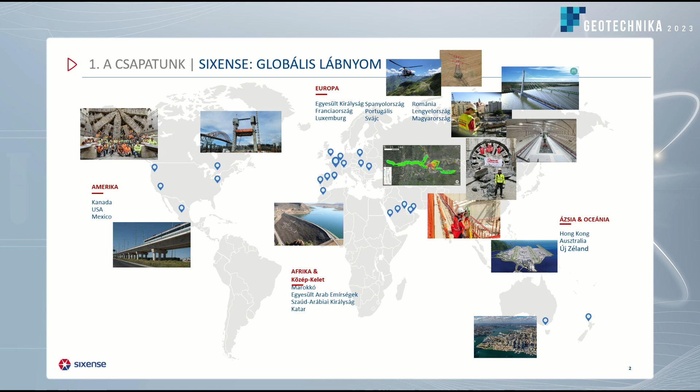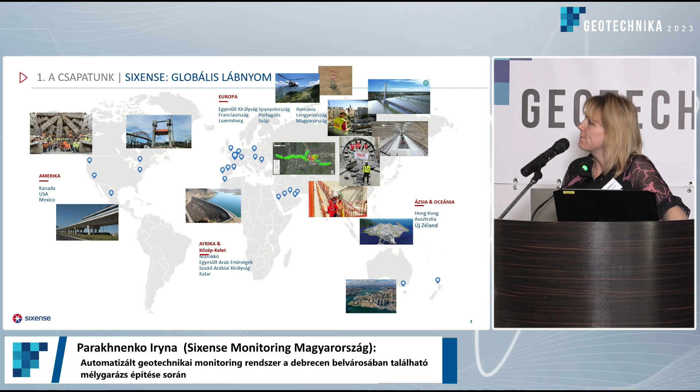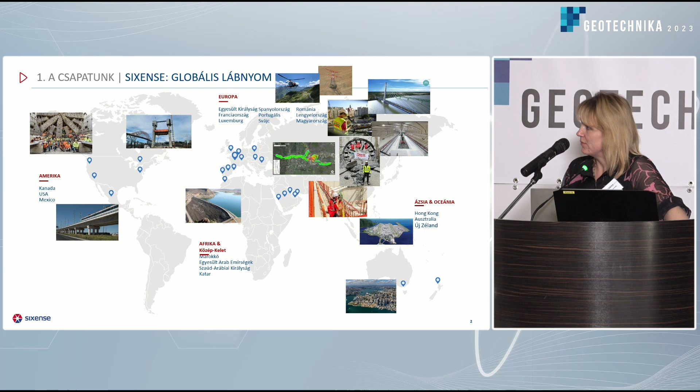Worldwide, the company has realized many complex projects in tunneling, hydropower, residential construction, power plants and other areas - dam construction, tunnel construction, bridge construction, wind power plants, nuclear energy, and more.

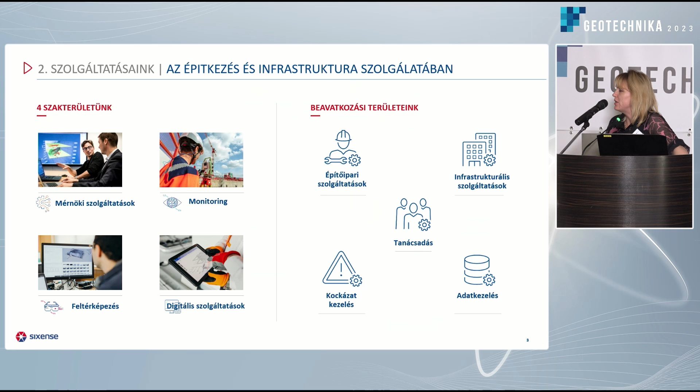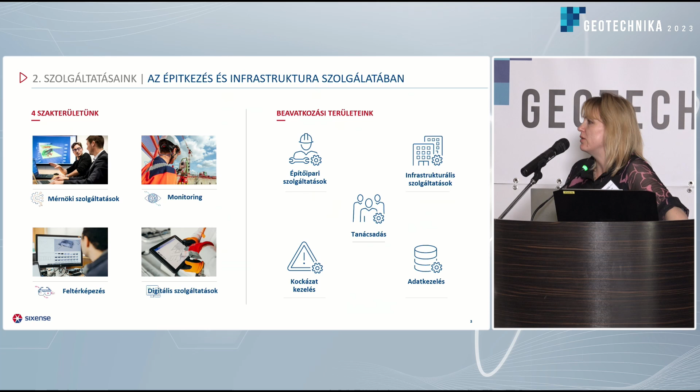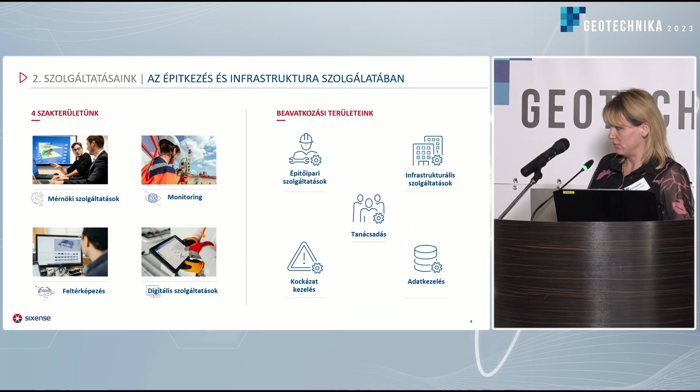And digital solutions, meaning several platforms to manage the construction process and monitoring data. It can be used in the industrial sector, infrastructure projects, and basically for existing sites and sites under construction.

It can be linked to urban construction, bridges, hydropower structures, industrial sites - buildings and functional facilities, transportation infrastructure, water infrastructure, energy, industry.

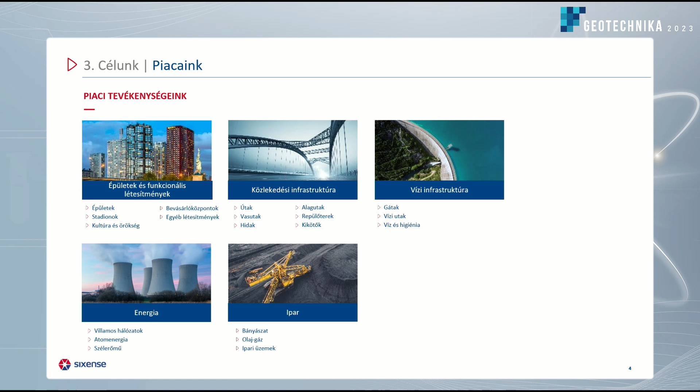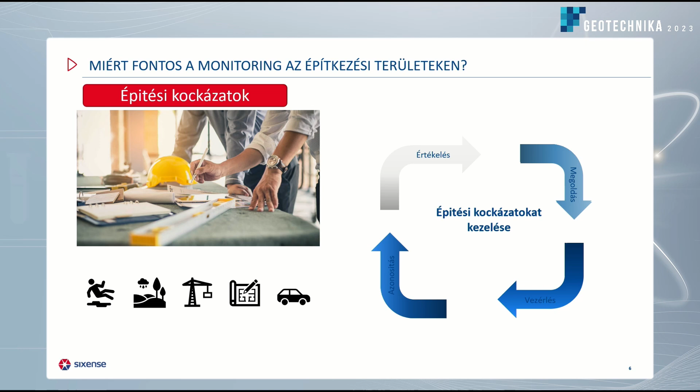Now I would like to come closer to the topic of our presentation and explain why automated monitoring is important during construction. First of all, because there are always risks related to construction.

Of course, not every situation requires automated monitoring - sometimes manual measurements are enough. Everything is assessed at the beginning, before construction work starts.

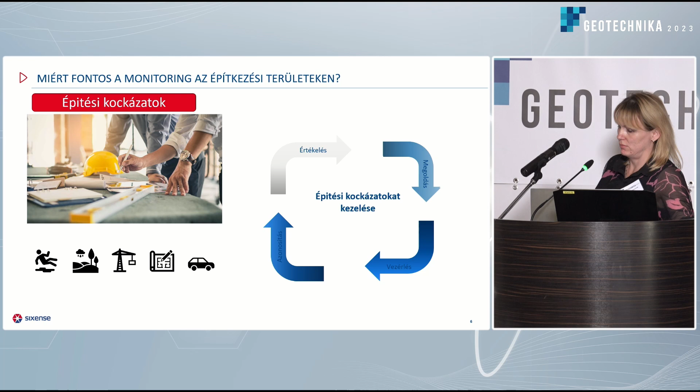But in cases involving underground structures, parkings, very narrow spaces - which are more and more common in cities where new buildings appear - in order to understand the impact of construction works on existing structures, monitoring needs to be more frequent and precise than manual methods, showing data in real time.

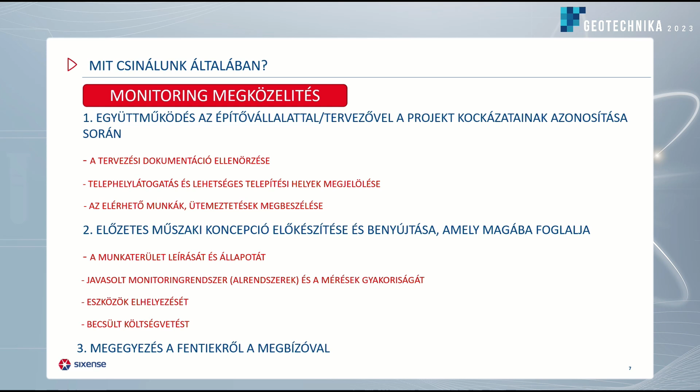Therefore, at the very beginning, we work with the construction company, the main contractor, or the designer to identify and understand the risks of the given project before starting work.

Then we prepare a preliminary technical concept of the system - design documentation, a monitoring plan - and this technical concept is agreed with the designer or main contractor.

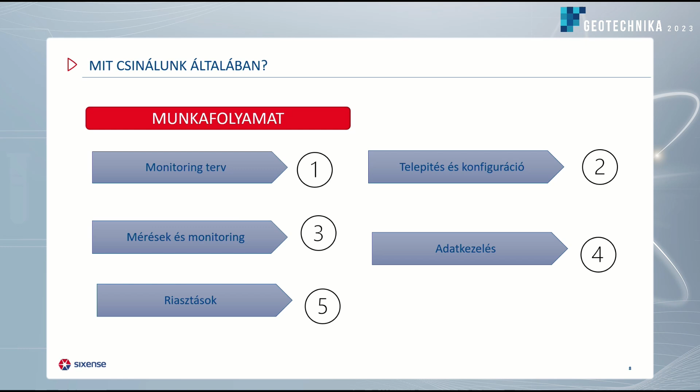And once it's agreed, we can develop a monitoring plan, install and configure the system, perform the monitoring, and provide data automatically with the requested frequency and an inbuilt alarm system.

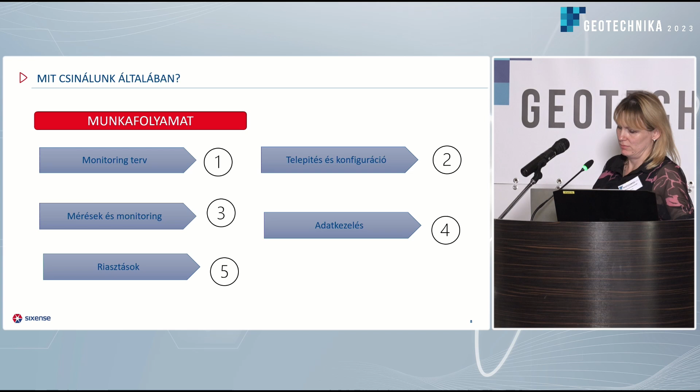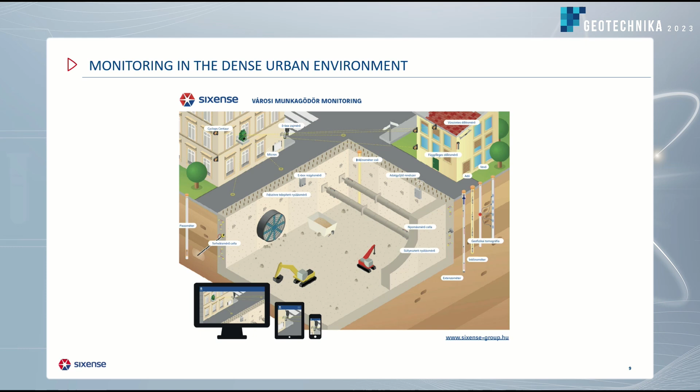On the example of this scheme, in the case of construction in the city, we can propose different systems that control settlements, movements, or deformations - as shown in this image of a densely built urban environment, with various solutions for problems like deformation, settlement, and ground movement.

Usually we do not manufacture any sensors ourselves, but we can integrate any type of sensor into our system. The heart of our system is our software, which can process and provide data for analysis to the relevant persons.

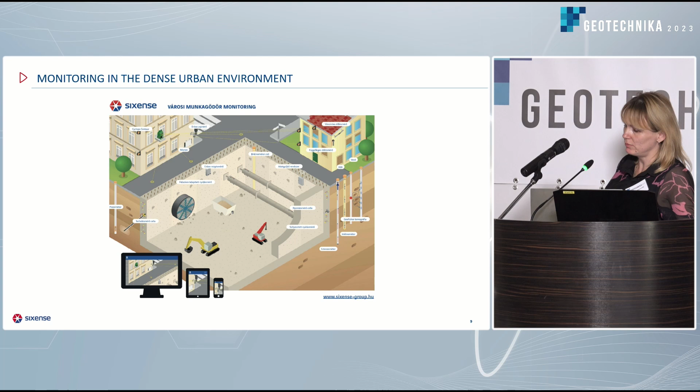This concept of an automated monitoring system can be used in different areas - as already said, in the city or for landslide areas. Depending on the technical situation, problem, or risk, we can propose the relevant instruments and provide the possibility to analyze data.

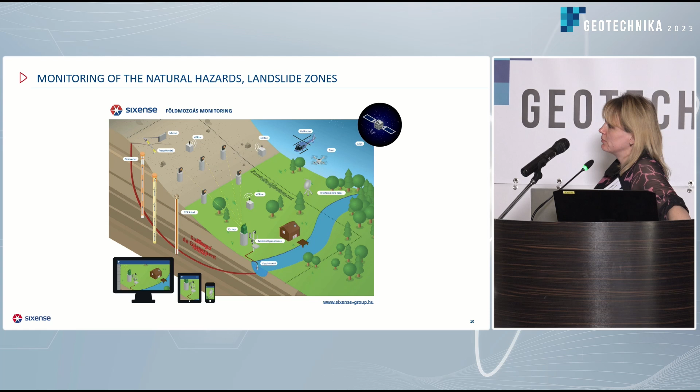This can include inclinometers, piezometers, surface movement sensors, or deep movement sensors.

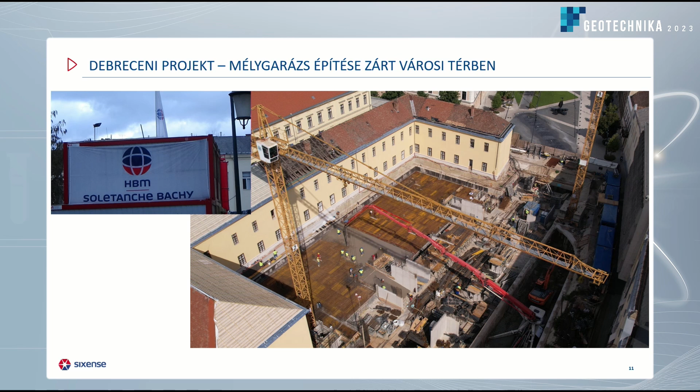And now we will go to a few slides about the project in Debrecen, which we did together with HBM. We were very happy to have this great experience.

This project was done during one year, I think, for the monitoring system.

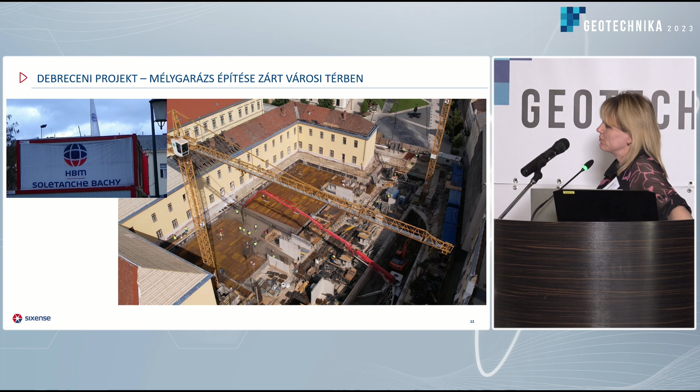Here I can see a few slides. It just shows the surrounding streets and buildings for the construction site.

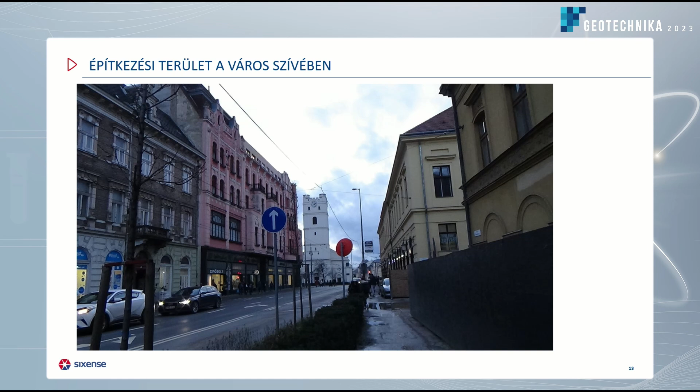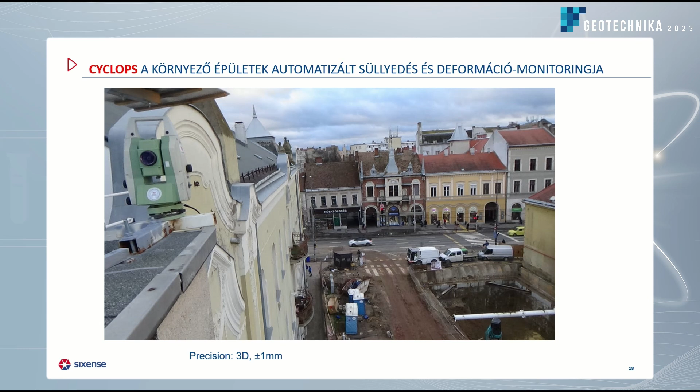And basically you can see on the top of the roof we have installed one automated geotechnical monitoring system.

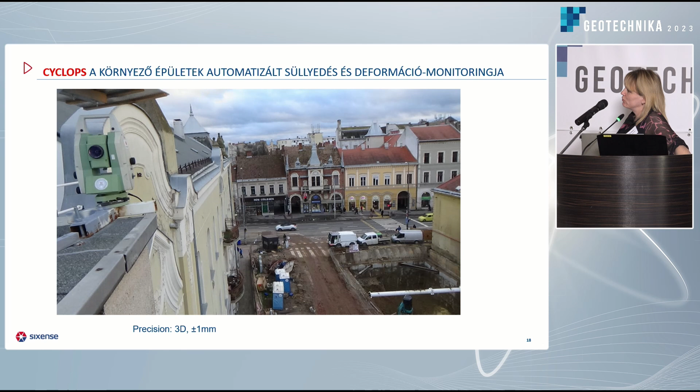And this is a control box of the monitoring system.

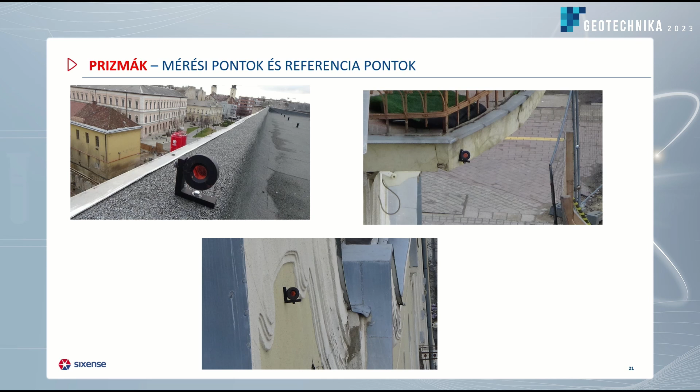And basically this monitoring system operates using two types of points: control points that are installed on the surveyed buildings and reference points that are outside of the zone of influence of works.

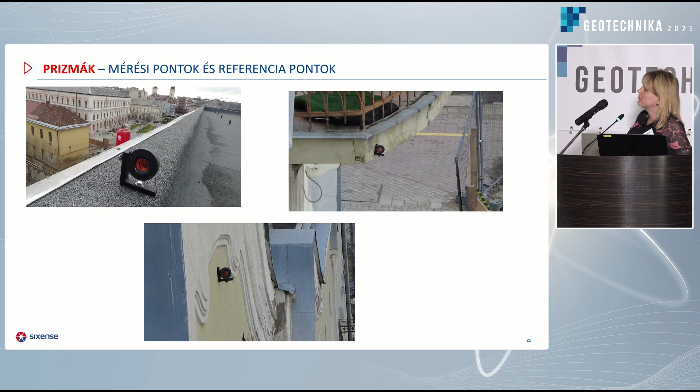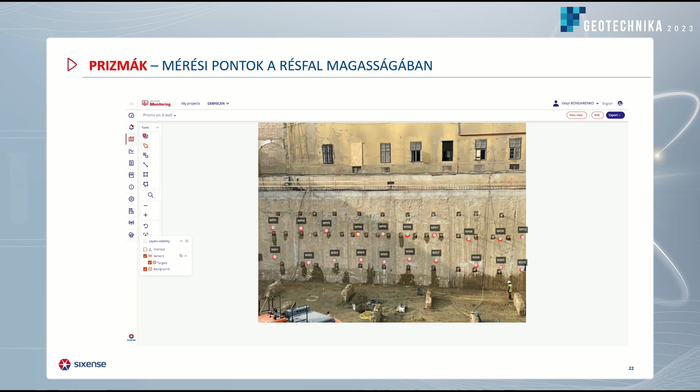Also, when the wall was constructed, we were requested to install, basically during the construction, the monitoring points for automated measurements on different levels of the D-wall.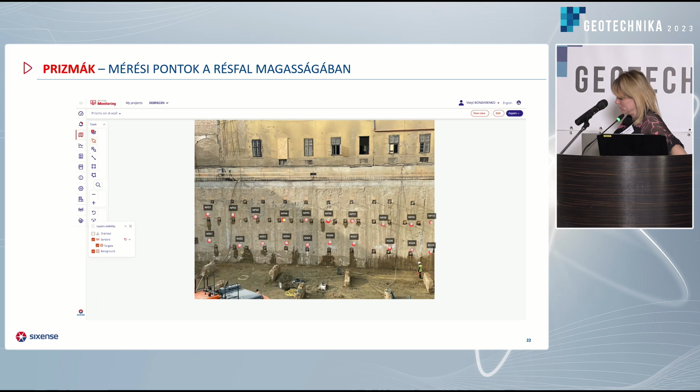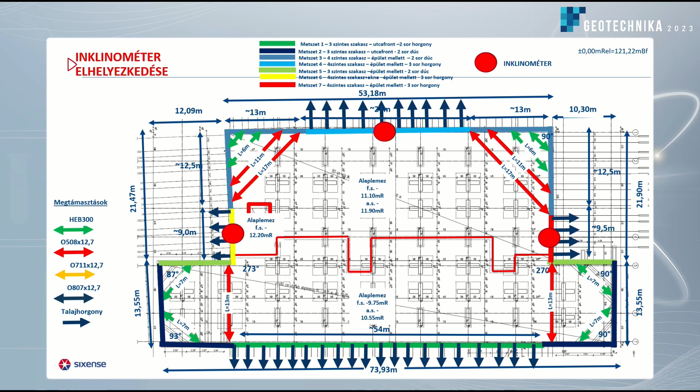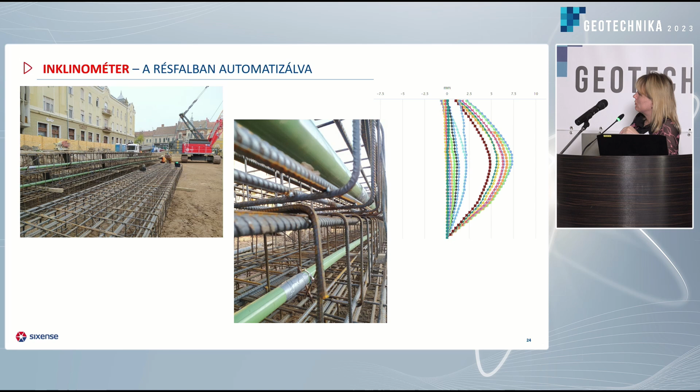And also another part of the system was to install pressure cells. Benedek also mentioned it. So basically all these elements of the monitoring system, Cyclops system, inclinometers and pressure cells, were installed in order to monitor the parts which were the most interesting for designers.

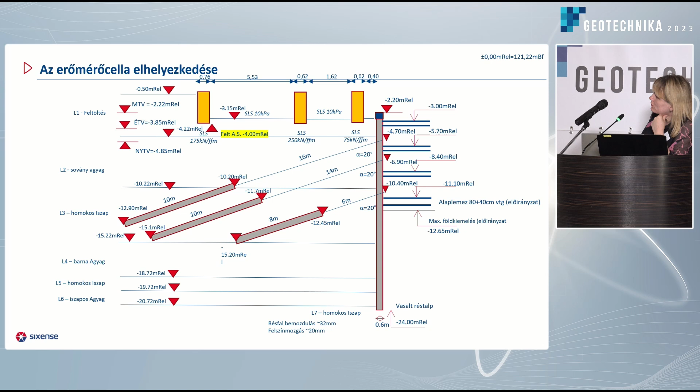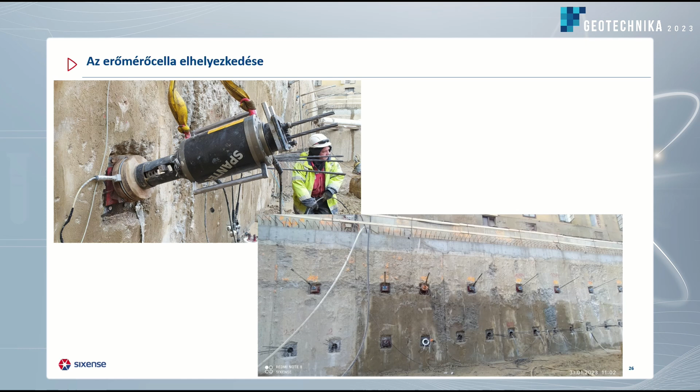And of course, all this is, let's say, hardware. It's just hardware if the data cannot be treated, if it cannot be visualized, if alarms cannot be received. That's why the design department and construction site responsible people had access to a specialized software tool which visualizes all this data.